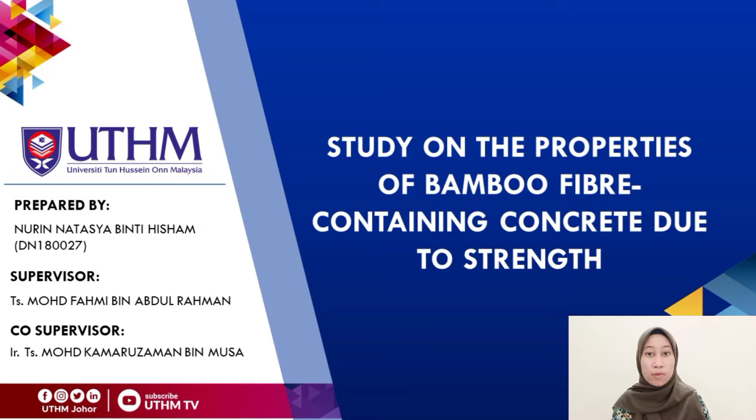My matric number is DN180027, my supervisor is TS Muhammad Fahmi bin Abdul Rahman and IR TS Muhammad Kamaruzaman bin Musa is my co-supervisor. I would like to present my bachelor degree project entitled Study on the Properties of Bamboo Fibre Containing Concrete Due to Strength. I begin my presentation with the content of the slide. First, we have introduction, problem statement, objective, literature review, scope and limitation, methodology, testing, and lastly, references.

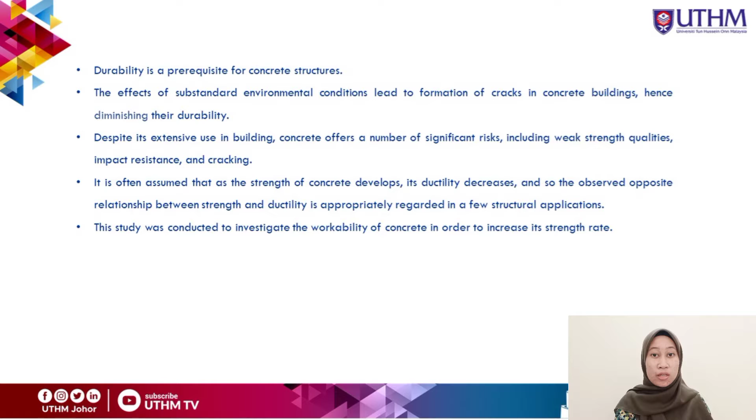For the introduction, durability is a requirement for concrete buildings. In essence, substandard environmental conditions cause cracks in concrete structures, reducing their durability. Despite its widespread usage in construction, concrete poses significant risks including weak strength properties, impact resistance, and cracking. It is often assumed that as the strength of concrete develops, its ductility decreases, and so the observed opposite relationship between strength and ductility is appropriately regarded in a few structural applications. This study was conducted to investigate the workability of concrete in order to increase its strength rate.

Next, problem statement. Plain concrete has a very low compressive strength, minimal ductility, and little crack resistance. Structural cracks, which are microcracks, develop even before charge in plain concrete and comparable fragile materials, especially as a result of drying, shrinkage, or other reasons for volume change. Additionally, it is well established that temperature variation may result in stresses in concrete structures that are of the same order of magnitude as the dead and live load in some circumstances. As a result, using bamboo fibre as an addition in concrete can help to overcome these issues while also increasing the strength of the concrete.

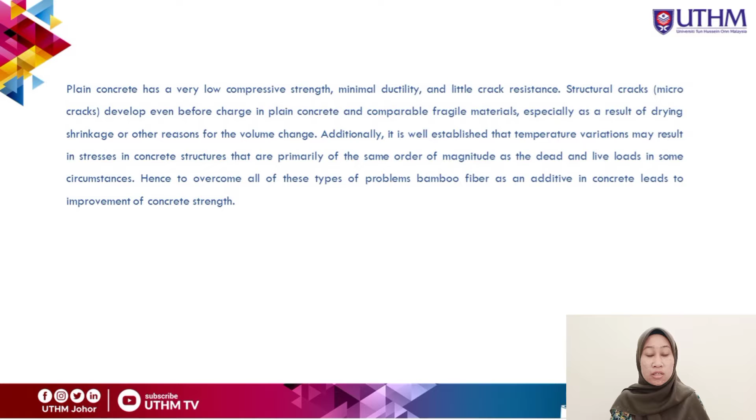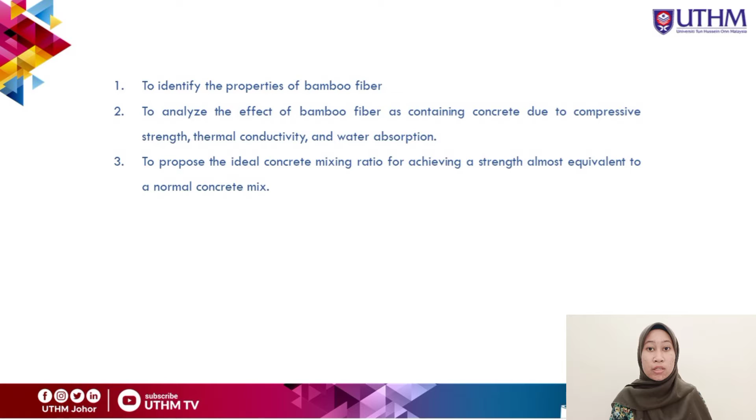The objective of this study is to identify the properties of bamboo fibre, to analyze the effect of bamboo fibre containing concrete on compressive strength, thermal conductivity, and water absorption, and to propose the ideal concrete mixing ratio for achieving a strength almost equivalent to a normal concrete mix.

Next is literature review. Firstly, concrete. Concrete is one of the most commonly used building materials. Concrete is a composite material created by combining binding material. Depending on the amount employed, the mixture strength and quality will be affected. The structural design criteria are used to define the concrete construction grade. Concrete mixes are divided into two categories, nominal and design.

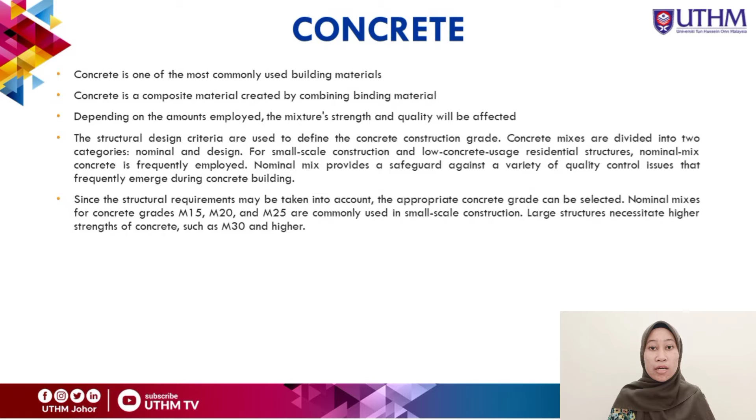For small-scale construction and low concrete usage residential structures, nominal mix concrete is frequently employed. Nominal mix provides a safeguard against a variety of quality control issues that frequently emerge during concrete building. Since the structural requirement may be taken into account, the appropriate concrete grade can be selected. Nominal mixes for concrete grades M15, M20, and M25 are commonly used in small construction. Large construction necessitates higher strength concrete, such as M30 and higher.

Next is the type of bamboo. Bamboo is often found thriving in tropical moist forests, especially in areas near river valleys, in already logged forests, in the bush, in forest areas that have been destroyed and abandoned due to shifting cultivation, clearing land for agriculture, and even logging. In our country, bamboo is usually available from sea level up to 1,000 meters high, and it can live in most areas such as river banks, flat land, and hill slopes.

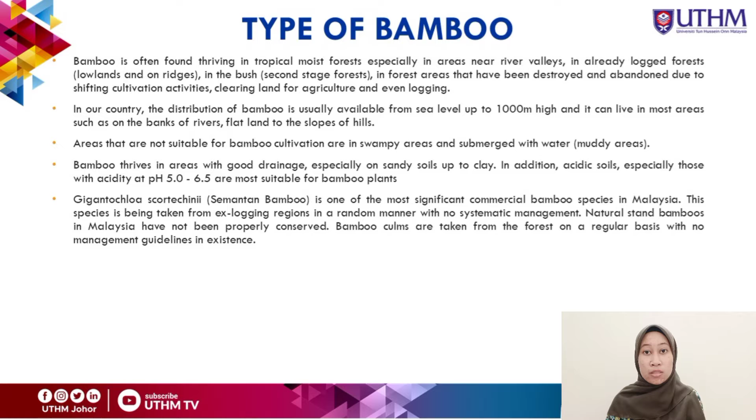Areas not suitable for bamboo cultivation are swampy areas submerged with water, which are muddy areas. Bamboo thrives in areas with good drainage, especially on sandy soils up to clay. In addition, acidic soils, especially with pH 5 to 6.5, are most suitable for bamboo plants. Semantan bamboo is one of the most significant commercial bamboo species in Malaysia. This species is being taken from ex-logging regions in a random manner with no systematic management. Natural stand bamboos in Malaysia have not been properly conserved. Bamboo culms are taken from the forest on a regular basis with no management guideline in existence.

Next is application of bamboo. A variety of construction applications, particularly in developing countries, make bamboo one of the oldest and most adaptable building materials in the world. Both durable and lightweight, it is widely used without further processing or polishing. Bamboo structures are simple to construct, resistant to wind and even seismic forces, and easily repaired if damaged. The construction process also incorporates associated materials such as bamboo-based panels and bamboo-reinforced concrete.

Global attention has been drawn to the need for a substitute material that is renewable, beneficial for the environment, and easily accessible as a result of dwindling wood supplies and harvesting limits in many parts of the world, particularly the tropics. Because of its rapid growth, adaptability to most climatic and edaphic conditions, and superior attributes to most juvenile, fast-growing wood, bamboo appears as a very reasonable alternative.

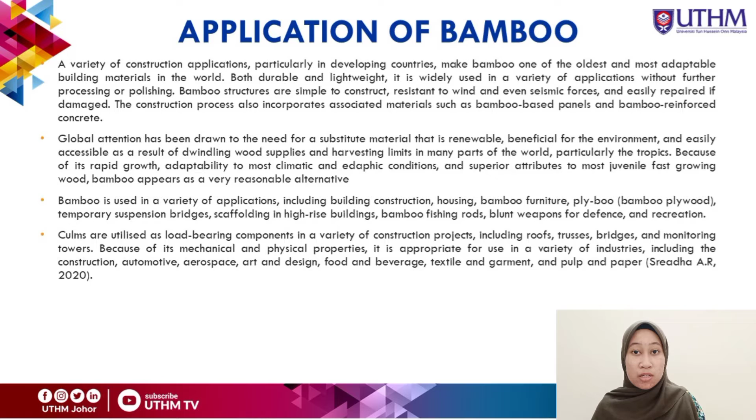Bamboo is used in a variety of applications, including building construction, housing, bamboo furniture, bamboo plywood, temporary suspension bridges, scaffolding in high-rise buildings, bamboo fishing rods, and blunt weapons for defense and recreation. Culms are utilized as load-bearing components in construction projects, including roofs, trusses, bridges, and monitoring towers. Because of its mechanical and physical properties, it is appropriate for use in industries including construction, automotive, aerospace, art and design, food and beverage, textile and garment, and pulp and paper.

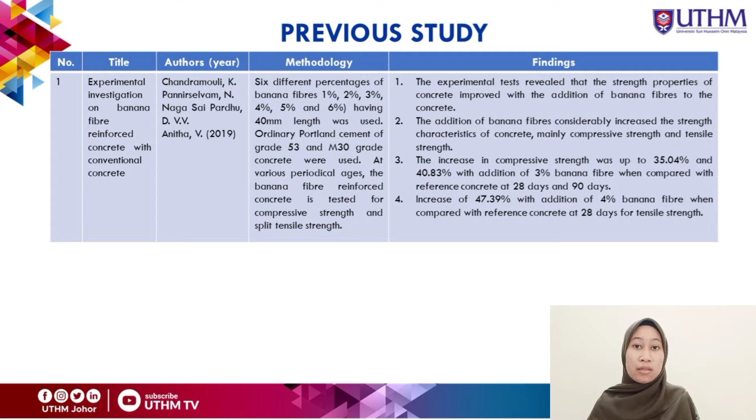And the finding is, the experimental test revealed that the strength properties of concrete improved with the addition of banana fiber to the concrete. The addition of banana fiber considerably increased the strength characteristics of concrete, mainly compressive strength and tensile strength. The increase in compressive strength was up to 35.04% and 40.83% with addition of 3% banana fiber when compared with reference concrete at 28 days and 90 days. Increase of 47.39% with addition of 4% banana fiber when compared with reference concrete at 28 days for tensile strength.

Next previous study is influence of bamboo fiber and limestone powder on the properties of self-compacting concrete. The methodology is the bamboo fiber at aspect ratio of 50 and a maximum length of 50 mm was varied in steps of 0.25%, 0.5%, 0.75% and 1% in the SCC mix, while 10% of the limestone powder was added as a filler in each of the SCC mix. The workability of the mix was assessed by slump flow test and V-funnel test, while the mechanical properties were assessed by considering the compressive and split tensile strength test after 7, 14, and 28 days curing age.

Then the finding is, it was observed that SCC mix containing the fiber content of 0.75% and 0.5% with the inclusion of 10% limestone powder achieved the highest compressive and split tensile strength value of 28.04 MPa and 3.26 MPa respectively. The results show an increment of 17.4% and 32% compared to the control mix. Hence, the bamboo fiber and limestone powder can be sustainably combined to regulate the flowability and improve the strength of the self-compacting concrete for local structural construction.

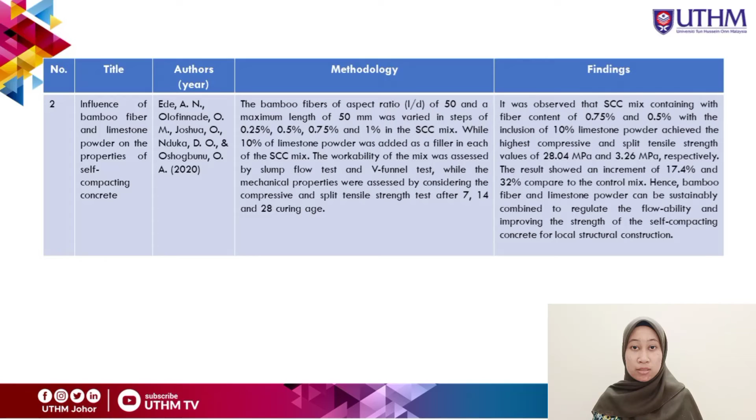For the last previous study is experimental study on concrete properties using pineapple leaf fibre. The methodology is the size cubes 150 mm times 150 mm times 150 mm, cylinder 150 mm diameter and height 300 mm and rectangular beam size of 150 mm times 150 mm times 70 mm are cast for both normal and pineapple fibre reinforced concrete; M20 grade mix of ratio 1, 1.5 and 3 is used. The water-cement ratio required for mean strength of 20 MPa is 0.45. Fibre-cement ratios of 0, 0.05, 0.10, 0.15, 0.2% were used. At various periodical ages, the fibre reinforced concrete is tested for compressive strength, flexural test, and tensile strength.

The finding is the compressive strength was increased up to 30.62% on addition of pineapple leaf fibre at 0.1%. The flexural strength was increased up to 46.858% as compared to conventional concrete. The tensile strength was increased up to 14.20% while adding pineapple leaf. Pineapple leaf fibre has hardness ranging from 60 until 70. Pineapple leaf fibre reinforced concrete increased its mechanical properties as compared to conventional concrete. Aggregate along with the pineapple leaf fibre gives less crushing value as compared to conventional aggregate.

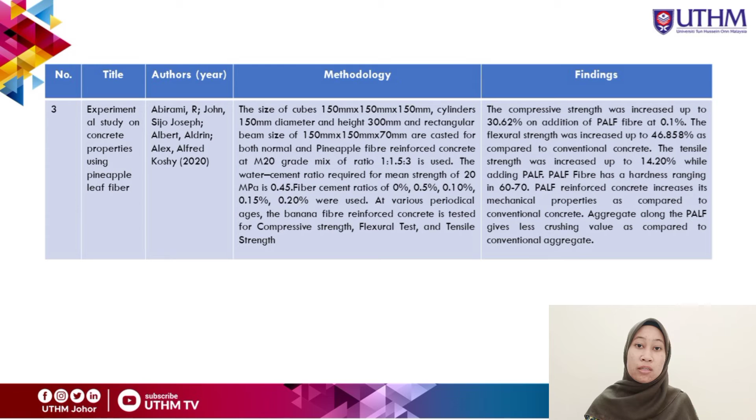Okay, next is scope and limitation. To identify the proper proportion necessary to produce a quality and durable concrete utilizing bamboo. Bamboo fibre in concrete with 3 different percentages are selected to build the concrete structure, which is 1, 2, and 3%. In order to study the performance of bamboo fibre containing concrete due to strength, there are several tests that will be studied, including water absorption, compressive strength, and thermal conductivity. However, the slump test is used to determine the fresh condition of the concrete in order to assure the batches of the same concrete are of consistent quality and strength.

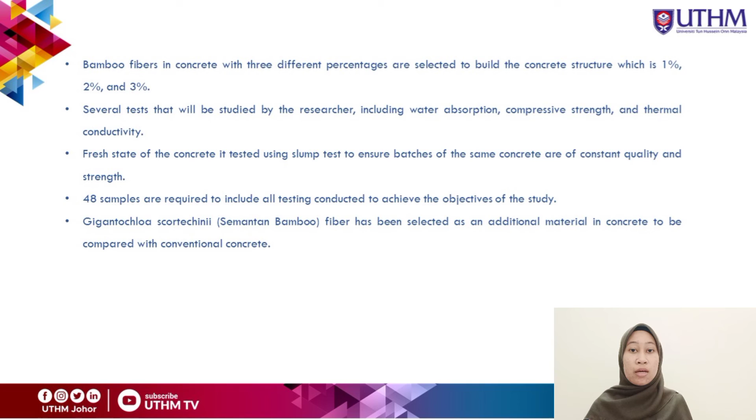In this study, a total of 48 samples are required to include all testing conducted to achieve the objective of the study. Besides that, to further strengthen in achieving the objective of this study, bamboo fibre has been selected as an additional material in concrete to be compared with conventional concrete.

Okay, next is methodology. For the methodology part, the flow chart is provided to give a clear view of the journey of this study. Firstly, I would like to explain the proportion of the concrete sample that will be used for the testing. In this study, the grade of concrete used is M30 with a ratio of 1, 0.75 and 1.5, which is cement, sand, and aggregate respectively, together with the percentage of additive, namely bamboo fibre. There will be 4 categories of sample altogether with the conventional concrete, which is the control sample.

Okay, then for the detailed number of samples, the compressive strength of hardened concrete will be tested in this study after 7, 14, and 28 days of concrete maturation. Meanwhile, thermal conductivity will be measured only after 28 days of concrete maturity. Water absorption will be determined on the same sample prior to compression testing. In order to achieve the objective, a total of 4 tests will be conducted. The slump test is used to determine the fresh condition of the concrete in order to assure that batches of the same concrete are of consistent quality and strength.

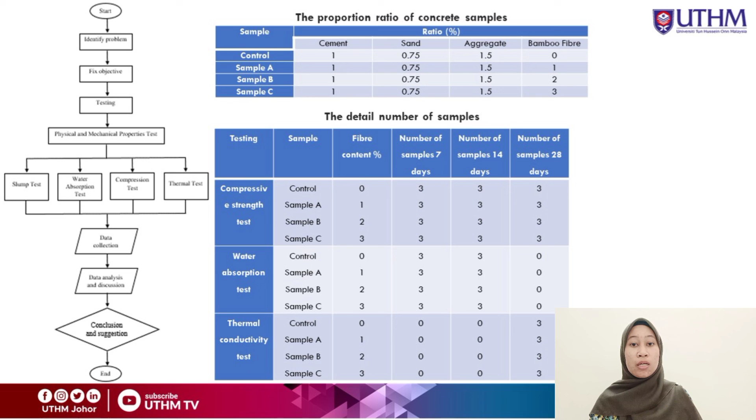Furthermore, water absorption tests are also needed to analyze the physical properties, to measure the amount of water that penetrates into the concrete sample when submerged. The measured absorption of each specimen is calculated as the increase in mass resulting from immersion expressed as a percentage of the mass of the dry specimen based on British standard. The sample is also tested to analyze its mechanical properties by using compressive strength test to determine whether the correct mix proportion of various materials was used to get the desired strength, and thermal conductivity is an important factor when considering the amount of heat transfer through conduction in concrete that can lead to cracking in concrete.